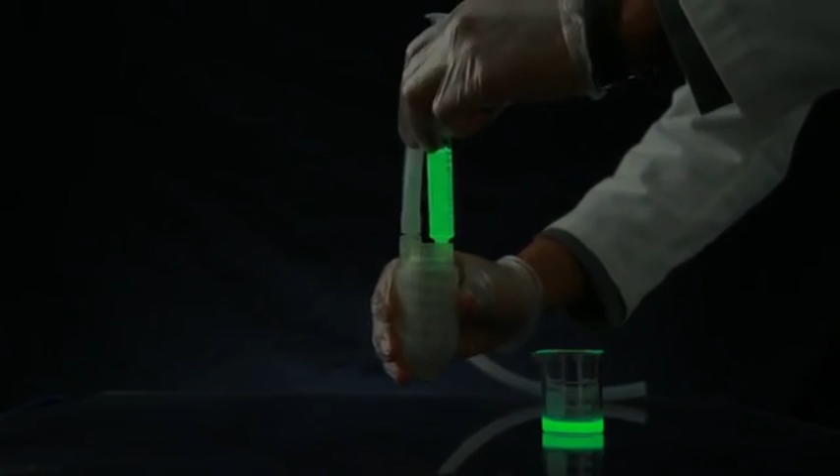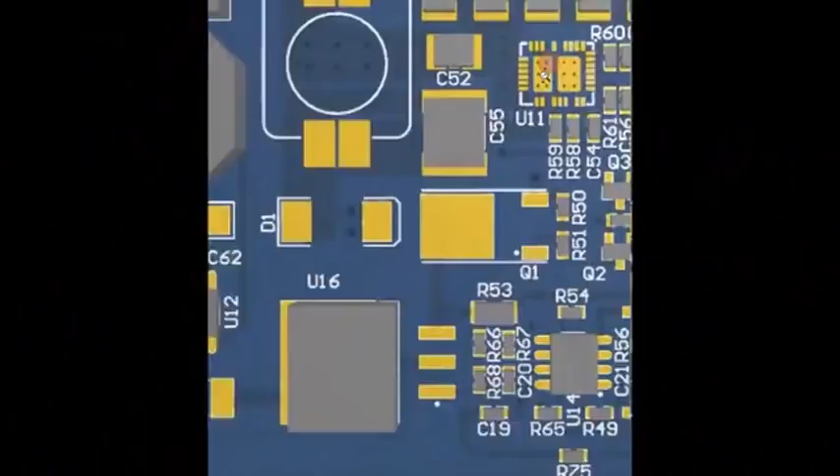We wanted our printer fast, while still maintaining quality. We designed our printer to be over 10 times faster, at 3000 millimeters per second, by optimizing chemistry, as well as our laser-controlled electronics.

Through several design revisions, we optimized the laser optics path to print objects up to 7 by 7 by 9 inches, and it also looks great on your desk.

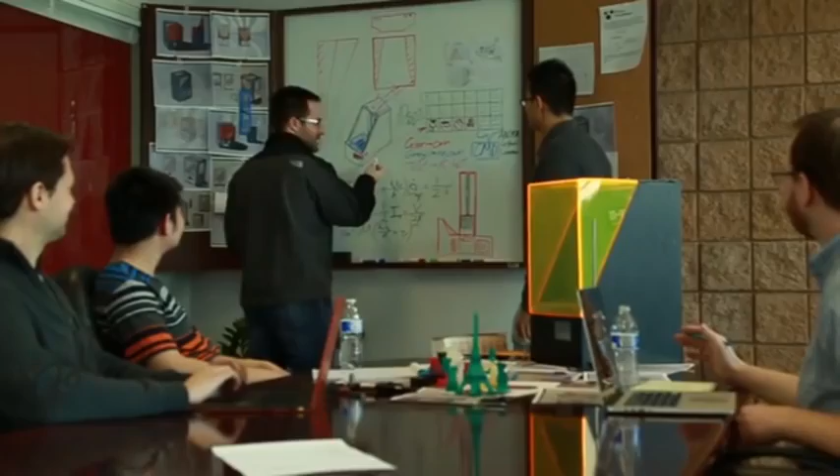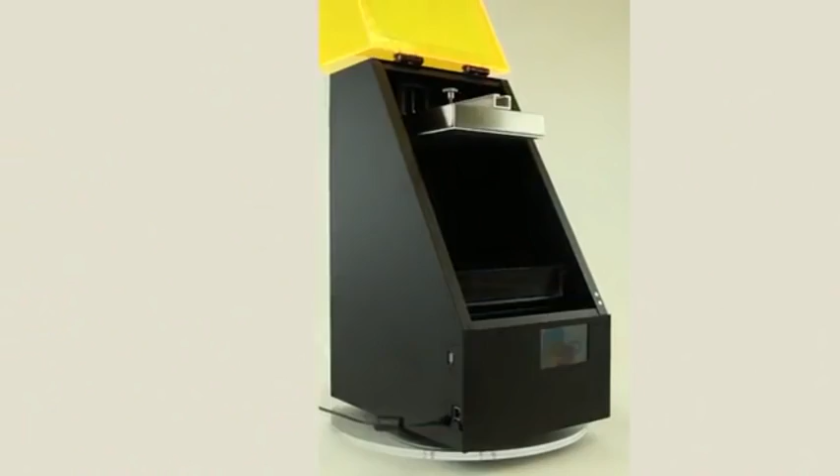Full Spectrum Laser specializes in advanced software and electronics, which we brought to our 3D printers. Prepare your models with our powerful, easy-to-use software. Add supports automatically or modify them manually. Easily connect over Ethernet, Wi-Fi, or USB.

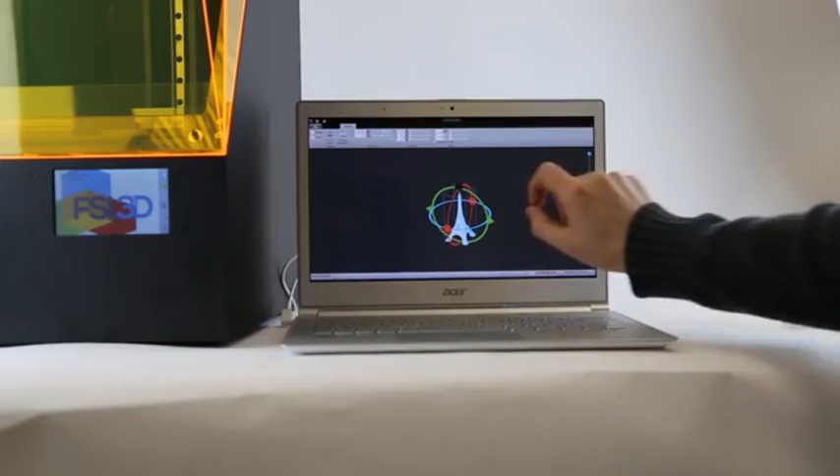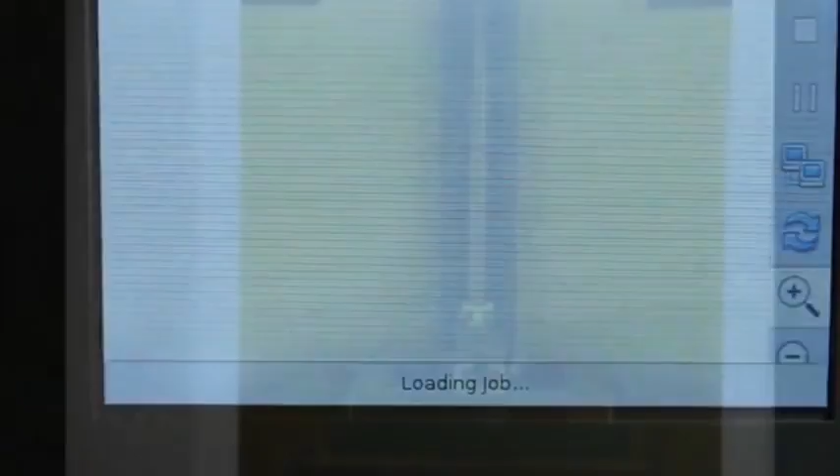Because our printer has a full touchscreen computer, you can even browse pre-tested objects online in our built-in model store and print them directly from the printer without ever turning on your computer.

We have a nozzle system which includes needle valves, so we're able to shut off the flow of plastic instantly. This means no more oozing, no more stringing as you move between parts, and no more bumps on the outside. This means perfect parts every time.

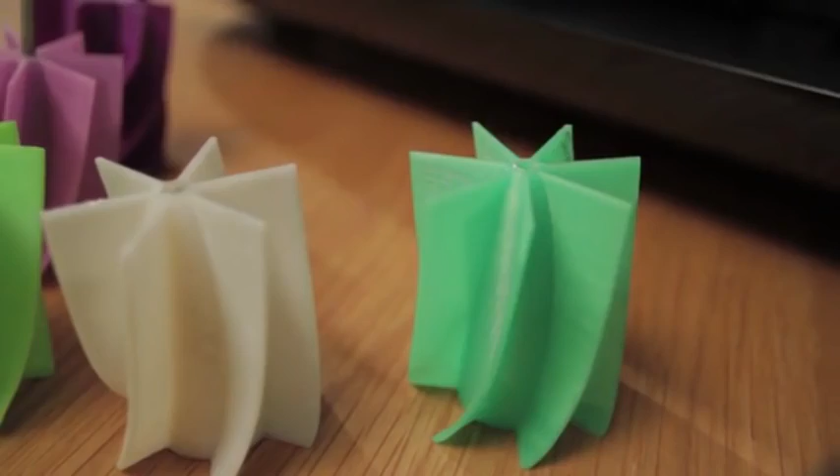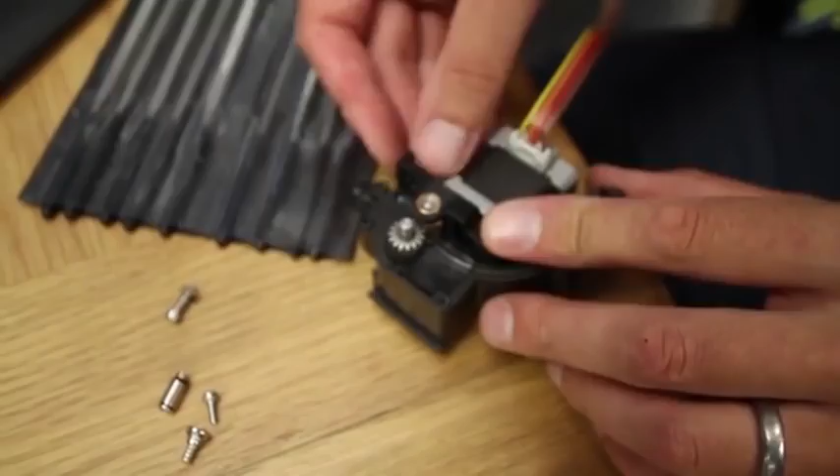We've also got a new extruder design that, rather than relying on one feed wheel and a follower, we have 2 contra-rotating feed wheels that grab hold of the filament, ensure it never slips, always forces material to the head, and reduces the chance of blockages.

Not only that, the extruder includes a closed feedback system, so we have an indexing wheel that monitors the filament moving into the extruder versus that that's coming out. So if there is any stall or blockage, the software knows straight away.

As soon as it knows, it can stop the print. You can then intervene and fix any problem that may have occurred, and then the printer will resume from where it left off.

Something I don't believe has yet been seen. Never before has a 3D printer been offered with this higher specification at such a low price.

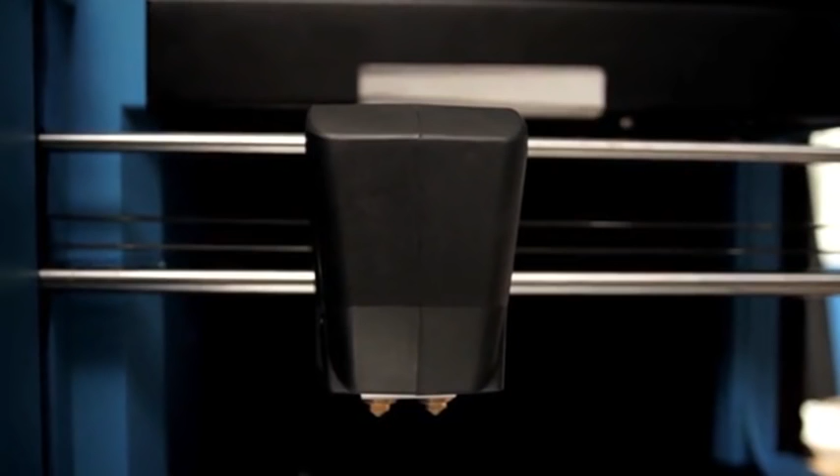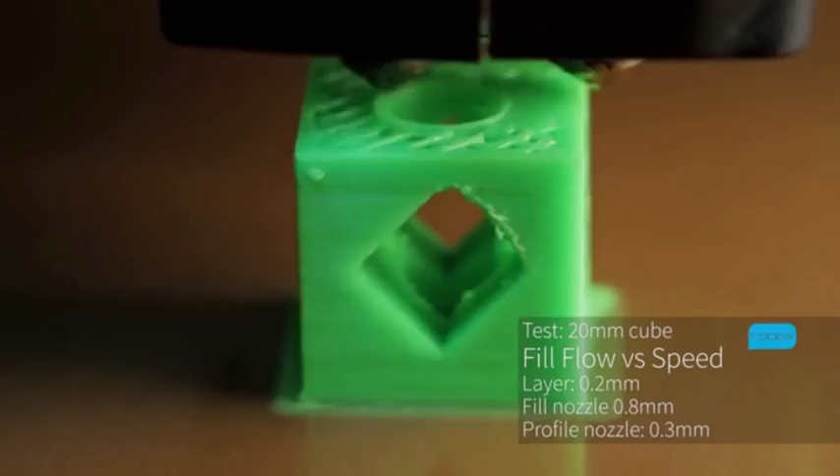In our head we have a twin nozzle system. This has a 0.3mm and a 0.8mm nozzle. This means that you have a high resolution but low speed nozzle for completing the high quality surface finish and perimeter of the part, and then a much larger nozzle which is capable of filling the part, resulting in print speeds of up to 300% greater than our competitors.

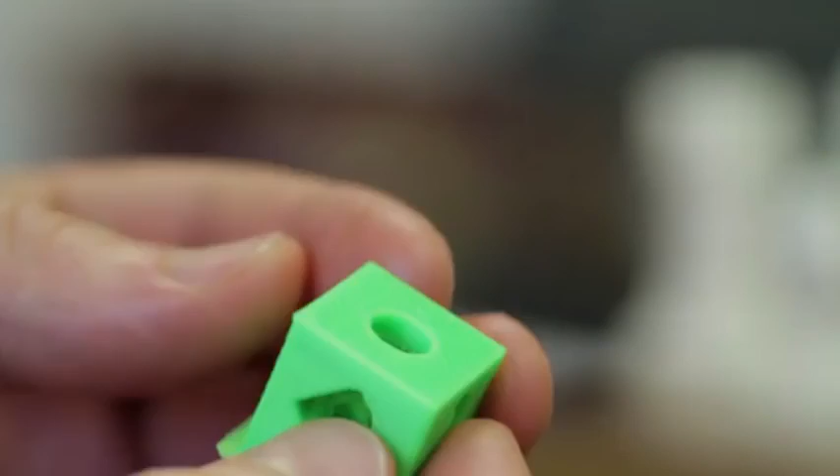Because we have a very rigid frame, we can operate the printer at much higher speeds than normal, and not only that, we have a Bowden tube extruder so that the extruder is kept separate to the weight of the head. This allows us much higher printing and travel speeds.

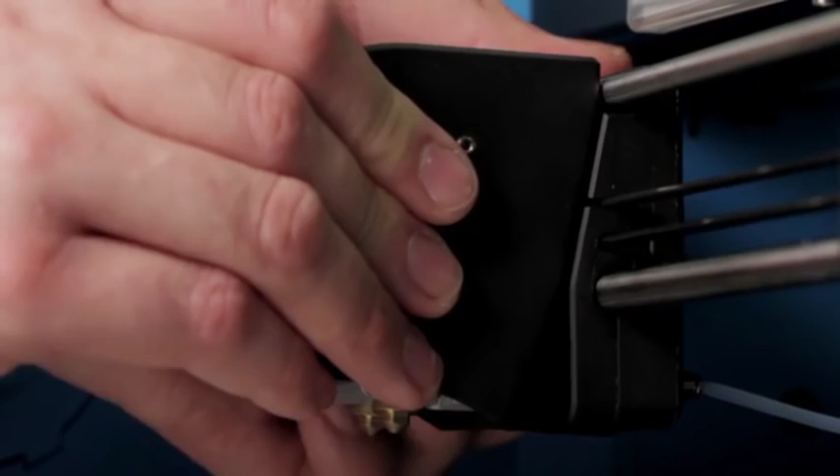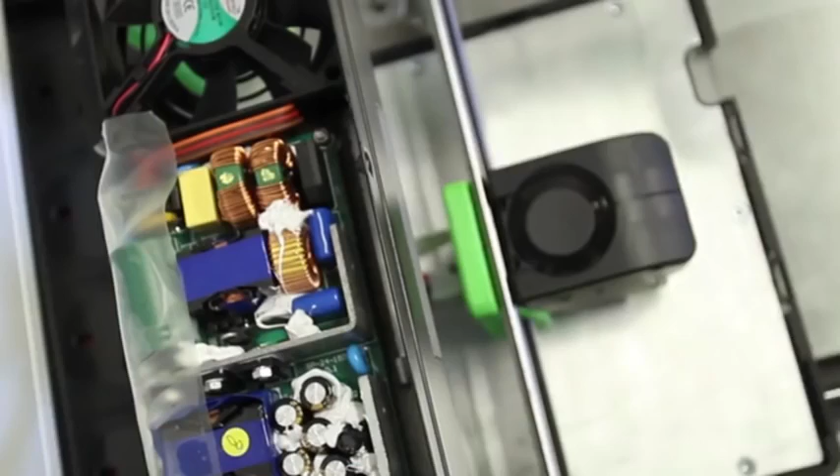Robox isn't just a stylish 3D printer. By simply removing the head, we can add much more functionality to our platform. So we're starting out with 3D printing, but we hope to move into 3D scanning, stylus cutting, die cutting, pick and place maybe for surface mount PCB assembly, and also into milling using simple materials such as balsa, foam, plastics, and maybe PCB tracks. The Robox platform really is endless.

It's not just a 3D printer.

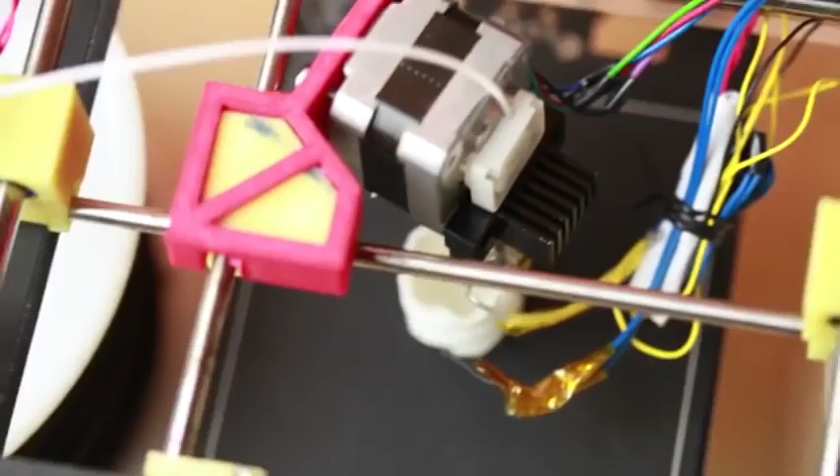Everyone is focused only on the technical aspects of 3D printers. However, we understand that the key to mass adoption lies in having an insanely great user experience. Based on your needs, the Buccaneer is built to be intuitive, relevant, and most of all, affordable.

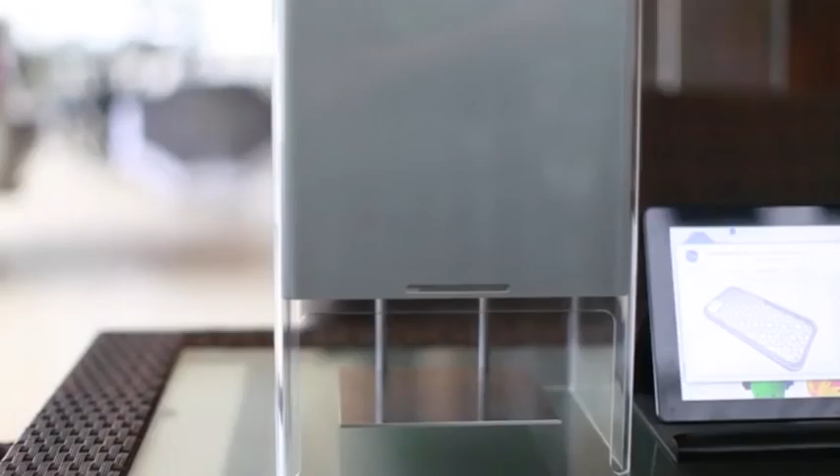What you're about to see is a culmination of a year's worth of innovation. Introducing the Buccaneer, the 3D printer that everyone can use. Simple and elegant, and that is what a 3D printer should be.

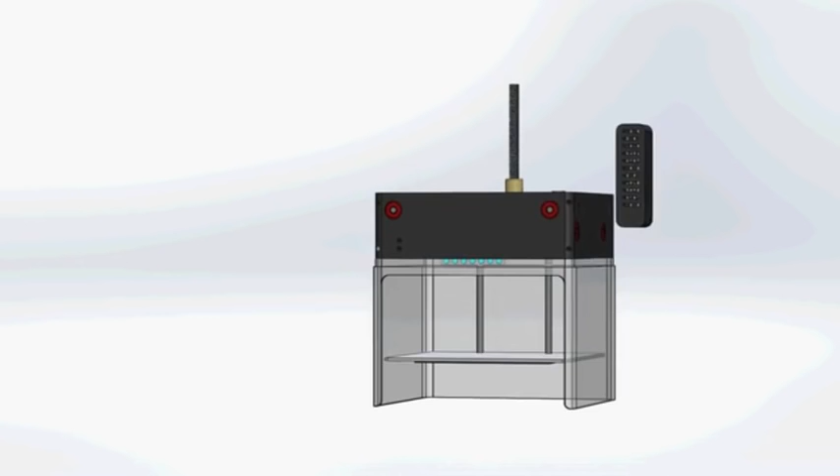The Buccaneer is very beautifully crafted, and what it does is amazing. It is elegantly designed as a closed box system, and this design helps to ensure reliable prints. And the inbuilt filter will ensure that no smell is emitted from the printer.

The plastic we use is biodegradable. The Buccaneer is environmentally friendly and food safe, so you can even eat from what you make. The Buccaneer is a 3D printer that truly looks at home on your table.

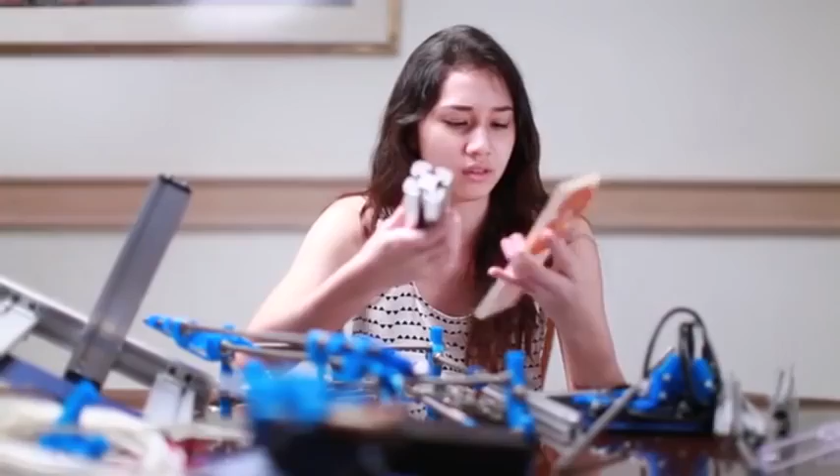I have been building 3D printers from kits for a couple of years. There's a complicated assembly, setup, calibration, and then slicing. It just gets really frustrating when you want to use a 3D printer as a 3D printer.

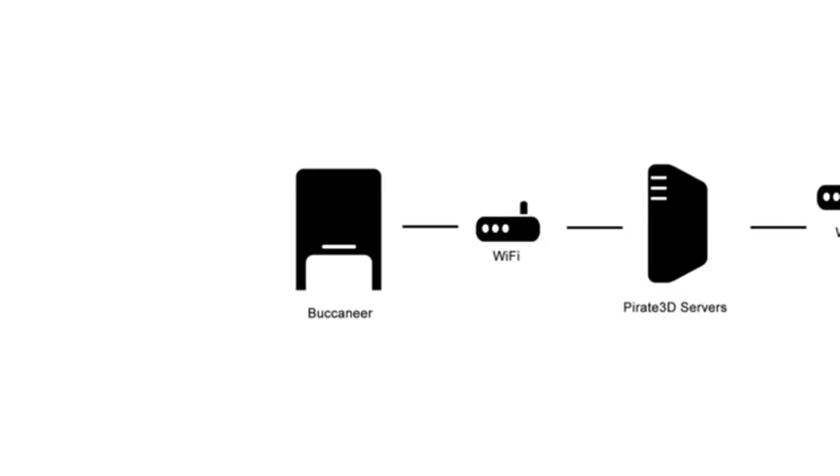We know your pain, and that's why we built the Buccaneer to be as intuitive and accessible to the everyday consumer as possible. The Buccaneer is so easy to use: you take the materials cartridge, slot it into the top, turn the printer on, and you're ready. Your printer will connect wirelessly to our library via your Apple or Android device. Just choose whatever you like to print, press print, and watch it go.

We started with a seamless design. We looked at all the existing 3D printers, took everything that we liked, and redesigned everything else. We knew that in order for them to really live up to their potential, they had to be affordable and completely effortless to use.

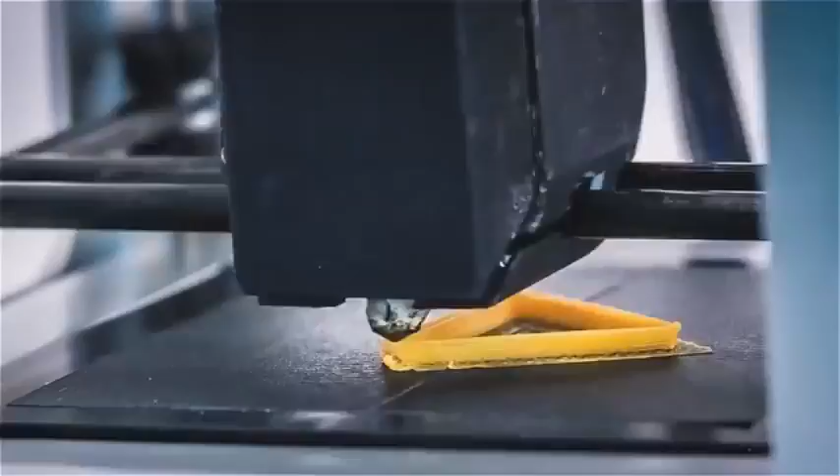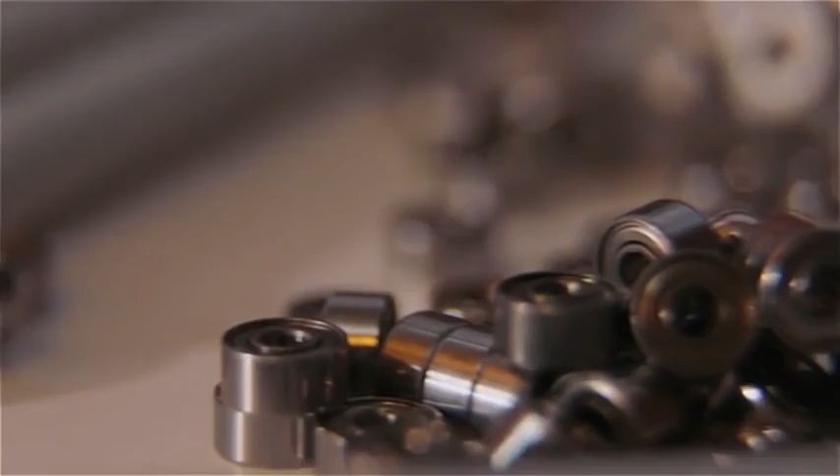And several months later, we'd done it. In addition to reducing the size and weight of the box, we also reduced the power consumption by about a factor of 10 compared to professional 3D printers. By making it more power efficient, you basically reduce your costs of every component. It becomes lighter, the electronics become more affordable, everything drops.

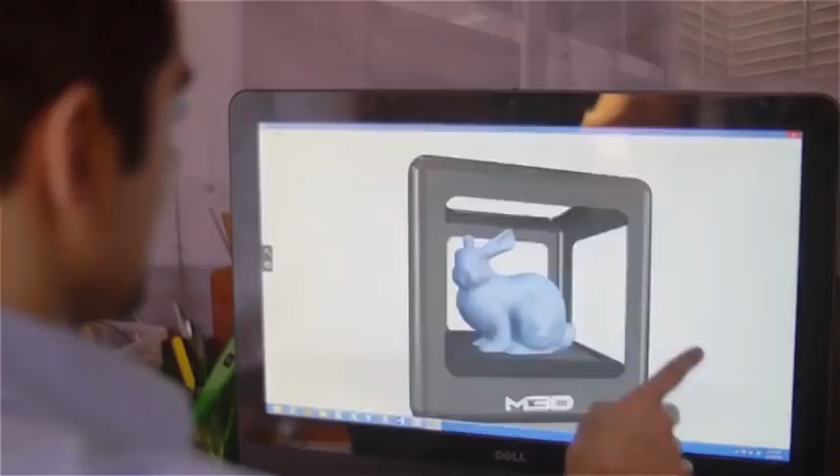We use auto leveling and auto calibration so that you're never messing with the printer. We decided we had to provide software that just makes it really easy, so we have a library of existing parts - select what you want, just hit print. People can use other sources for their filaments or they can use ours, and it goes both ways; other people with different printers can buy our filaments as well.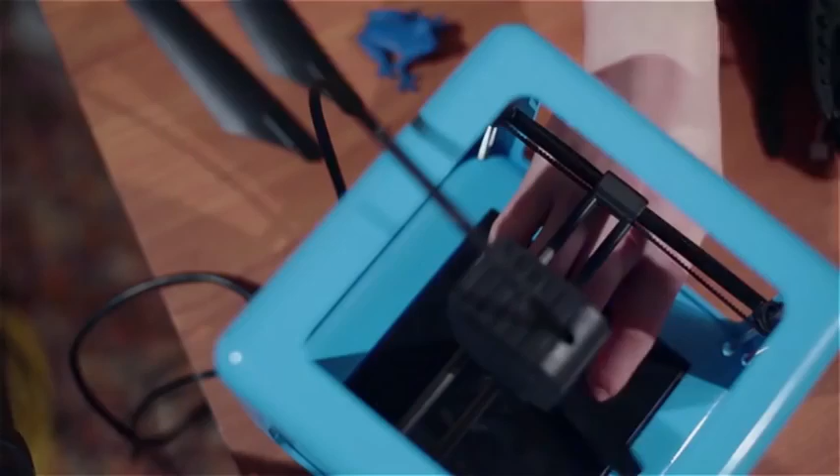The Micro 3D printer is for everyone, and we designed it to be perfect for beginner users but also for expert users. Of course, they're already very useful today - you can use it for things like replacing a shower hook, building real prototypes, or even functional parts and replacements for things around your house, for example. And that's just scratching the surface of what 3D printers are capable of.

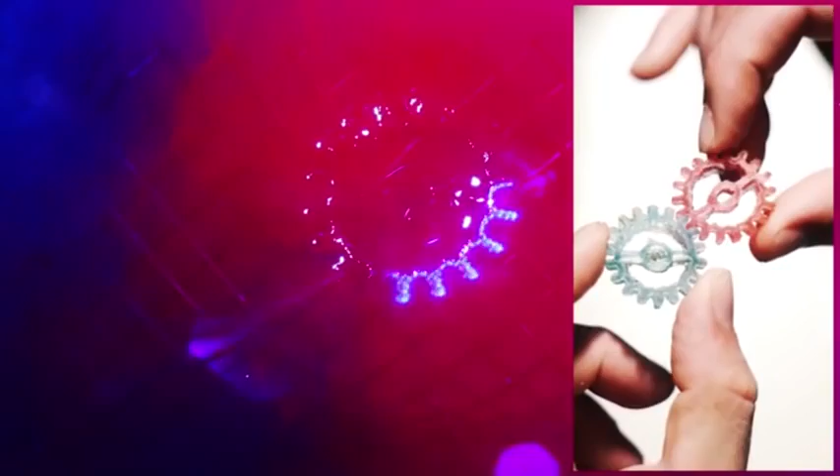You might be wondering, how can I possibly offer you a 3D printer that does all that for only $100? Unlike most other low-cost 3D printers, I didn't focus on using cheaper parts within the same design. Instead, I reinvented how the 3D printer works, using completely new methods that don't require the same expensive parts.

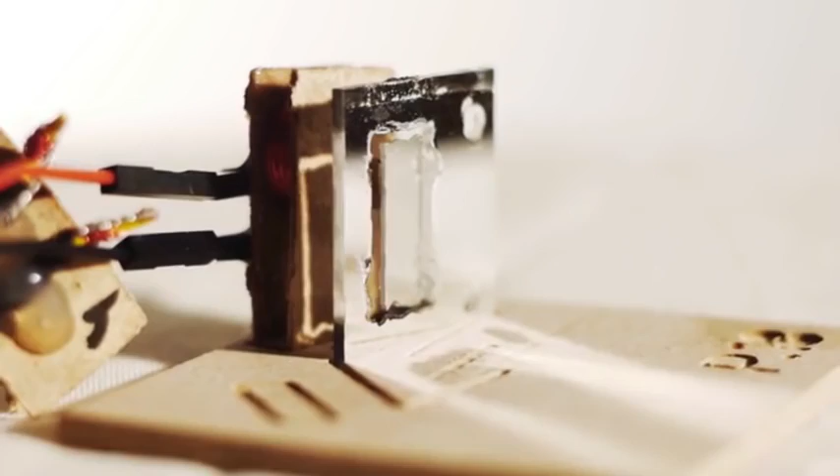I built my own galvanometers using a simple coil of wire and a magnet. A tensioned thread replaces the need for shafts, bearings, and springs. I wrote a script in Blender 3D that causes the sound card in your computer to drive the home-built galvanometers via your headphone jack, eliminating the need for an external microcontroller and a digital-to-analog converter.

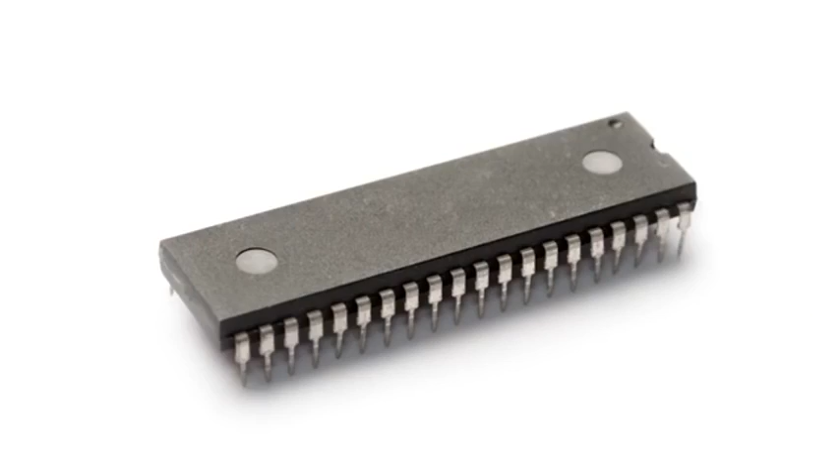This turns out to be extremely accurate, as most sound cards are 16-bit, meaning the signal going to the printer has a resolution of over 4 gigapixels.

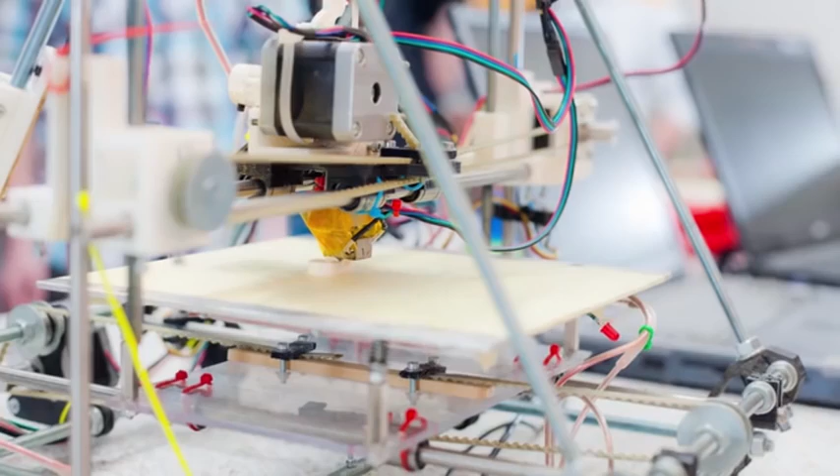The resin floats on top of salt water, so I created a drip system that feeds salt water into the print container, causing the resin floating on top of it to rise. This replaces the need for a rigid frame, stepper motors, and the electronics to drive them.

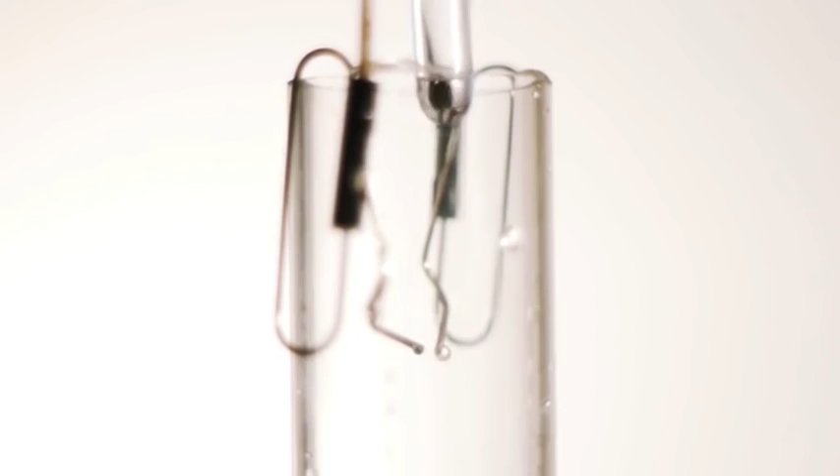I then needed to detect the level of the resin, so I created a switch by placing 2 metal contacts in the way of the drip feed. I wrote some code that detects the connection made when a drip hits the 2 contacts via the microphone jack in my laptop.

Even in a small container, it takes over 1,000 drips to rise the level an inch, and that gives this printer a Z resolution that is easily less than 1/1000th of an inch.